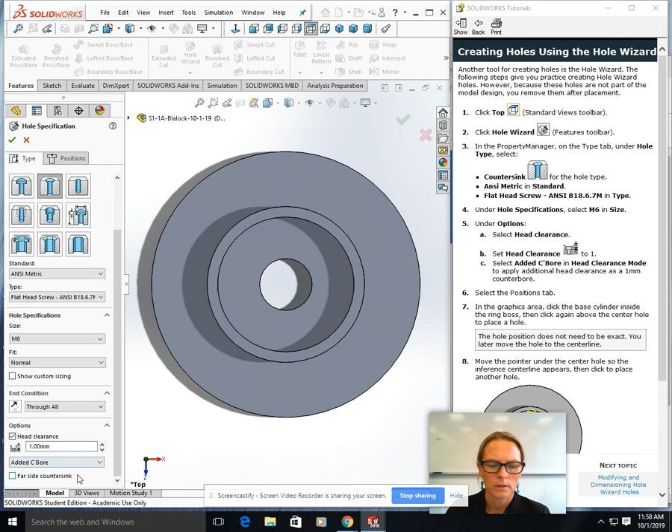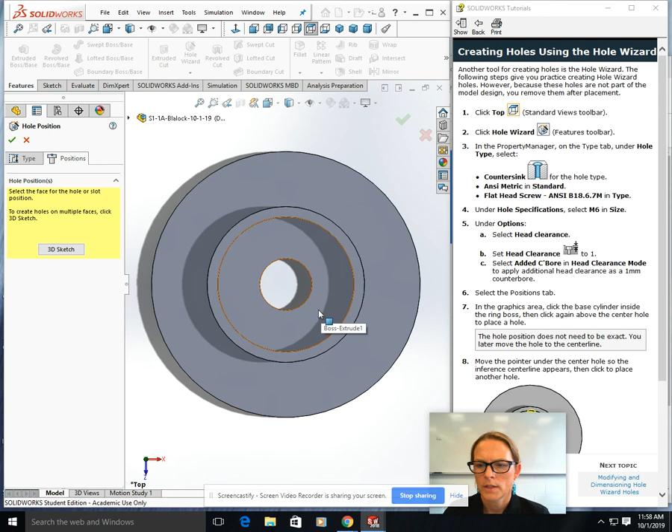Select the positions tab, so I'm switching over to the positions tab. In the graphics area, this area over here, click the base cylinder inside the ring boss. So this is my base, and it's all flat. If you remember, you drew one big circle, and this is my ring boss. So I'm going to click in here.

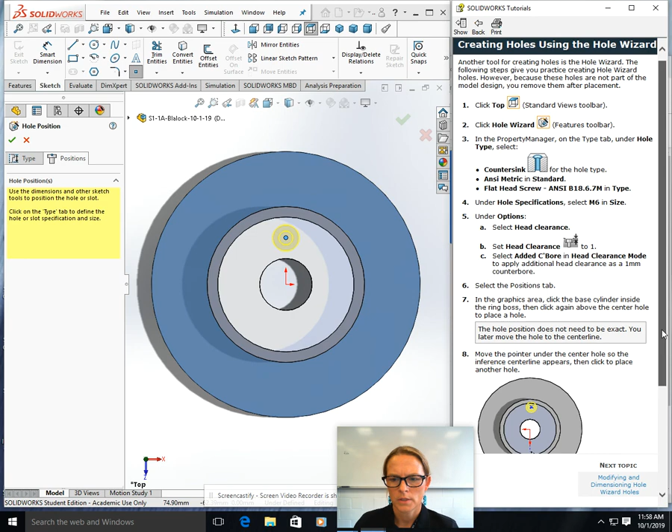Click, then click again above the center hole to place a hole. The hole position does not need to be exact. Move the pointer under the center hole so the inference center line appears. So if you notice when I bring the circle down for the hole, there's the blue dashed line there. That's the inference, meaning it's suggesting that is the center line of the circle. So because that's there, I know I'm lined up. If I go to the side a little bit, the blue line disappears. So once that appears, now I know I'm on the center line.

Move the pointer under the center hole so the inference center line appears, then click to place another hole. Click. Press escape to stop inserting holes. Escape, and that went away. Drag the first hole onto the inference center line. There we go - so there's no dash line, and then there's the dash line.

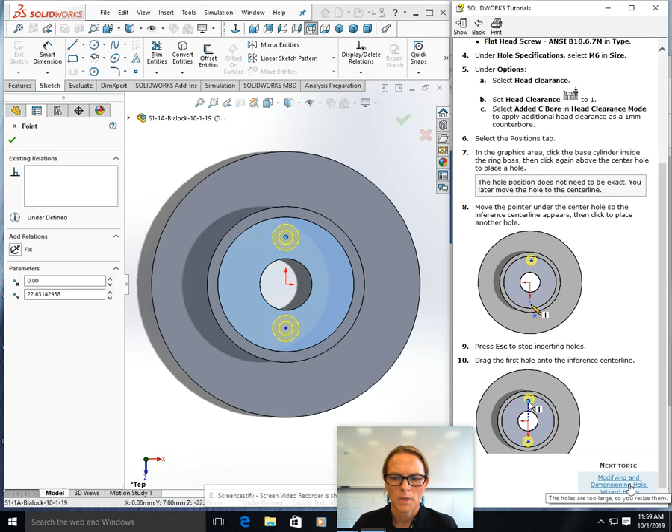Got it? Okay, now I want to modify and dimension the holes using the wizard. On the type tab - type, I don't see type. There we go, I must have to select the hole. So on the type tab, here we go, select M4 for the size. Whoops, M4. Click zoom to area.

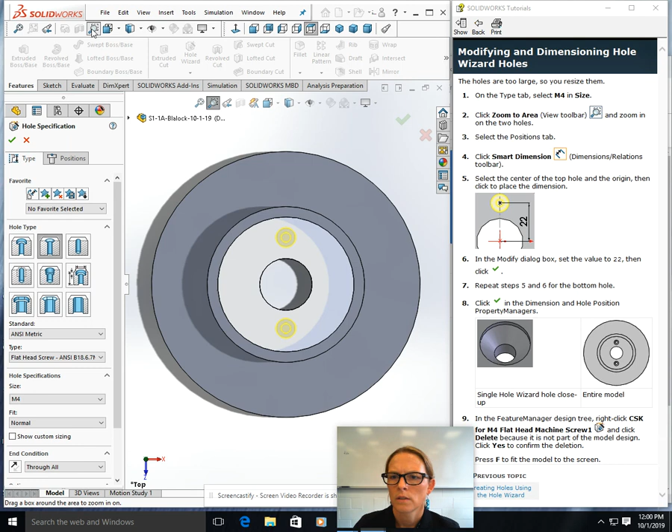Well, that'll be a good feature in case I lose my diagram - zoom to area. Okay, on the two holes, so I can see both of those. Select the positions tab. Done. Click Smart Dimensions. Click.

Select the center of the top hole. Click. And the origin - so right there, click. Oh, it appeared. Then click to place the dimensions, so let's have it appear over here. And the dimension I want is 22. Press the green check. Click.

Repeat steps 5 and 6. So I'm going to select the center of the bottom hole, select the origin. Click. 22. Check.

Now also click the check in the dimension and hole position property manager. Check, okay. Single hole wizard hole, close up entire model. In the feature manager design tree, configuration - feature manager, that very first one.

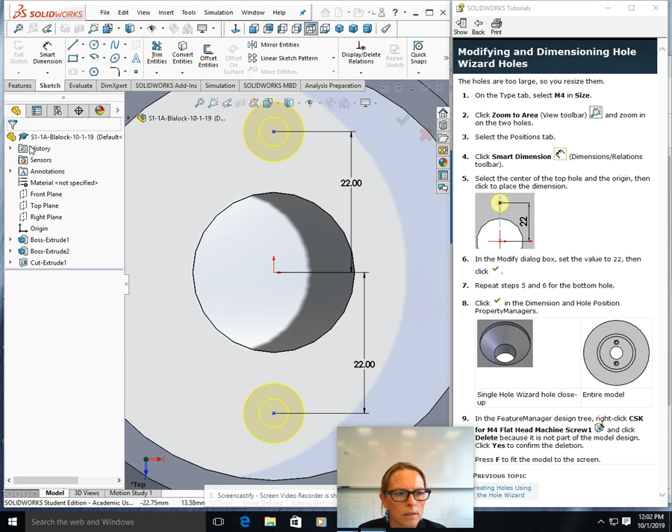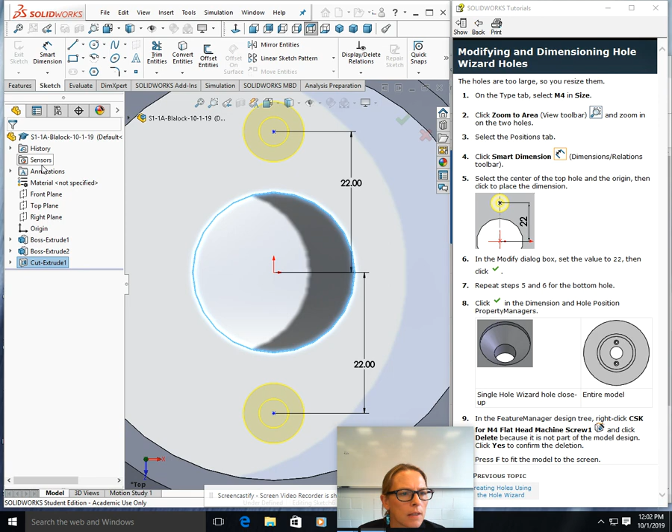Right click CSK, right click for CSK for M4 flathead machine screw 1. I don't see it. CSK. Right click CSK. All right, I found it.

So it says click the green check in the dimension, which we did after we typed in 22. Then it says also the hole position, so click on the green check over here.

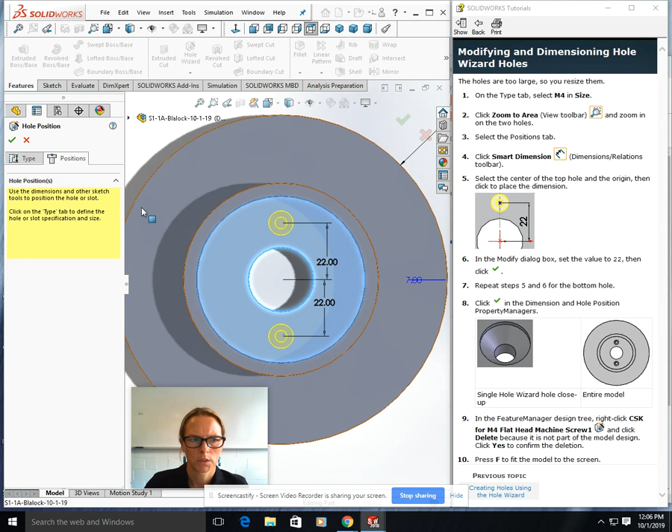A vertex. Okay, over here it says through all. That's our vertex, because a second ago it said vertex - through all is what we did before. So let's see here. If I click through all and then click the green check mark, that looks like that worked.

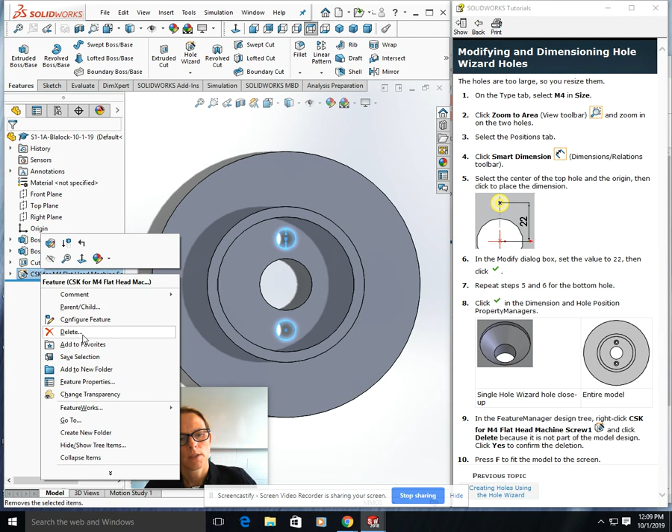Now it says in the feature manager tree, this first one, right click on CSK and click delete, because it is not part of the model design. Click yes to confirm deletion. Oh, so we just made - okay, so we made those two holes using the wizard, but we don't really need them, so we're going to delete them. Yes, delete them please. Great, so if I right click and delete, it'll take the whole thing off. So I suppose if I right click on cut, it'll give me the option to delete as well, and I don't want to do that though.

And that's how you use the hole wizard, and then you use the back button. Done.